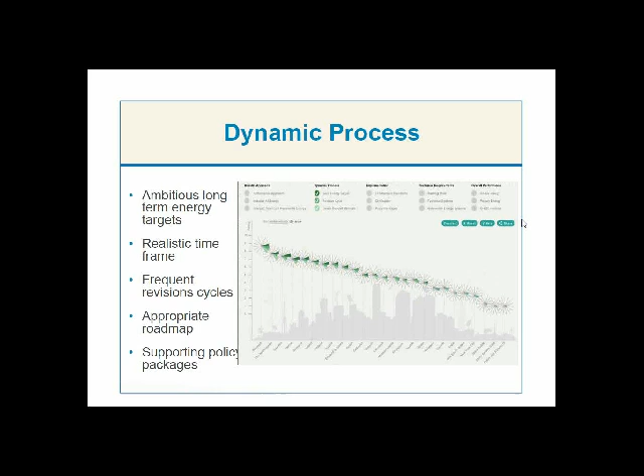You can see here a screenshot of the slide where we've just ticked all of the elements under dynamic process, and you can see how countries have rated under those themes.

As part of the dynamic process, we also considered levels beyond the minimum standards set within the code. We wanted to see if these levels have been encouraged by labeling or certification schemes, and if code developers were encouraging developers to clearly define classes and exceed the minimum standards set within the code.

To conclude, there's clearly a need for stronger energy targets supported by frequent revision cycles in a number of jurisdictions. On the other hand, we've seen a lot of positive examples out there, and we'd really like to learn from these positive and practical examples and to see how countries have been implementing these targets and revision cycles.

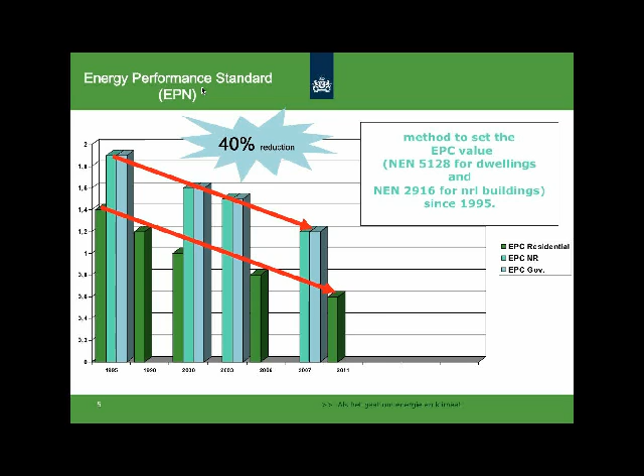If you look at the effects of this approach, since the introduction in 1995 we have had a reduction of more than 40% in energy use in the housing sector, as well as in the non-residential sector. That's quite a significant number.

If we go into the future, at the moment we are working toward what we call the road to 2020, because in 2020 we want to go to really zero energy buildings. Both the Netherlands as well as the European Union have set targets to reach this goal, and the graphic shows the way to that zero energy target over the years. So we have an EPC at the moment of 0.6, and we go in 2015 to 0.4, then 2018 to 0.2, and then finally in 2020 to 0. I will explain later what that means.

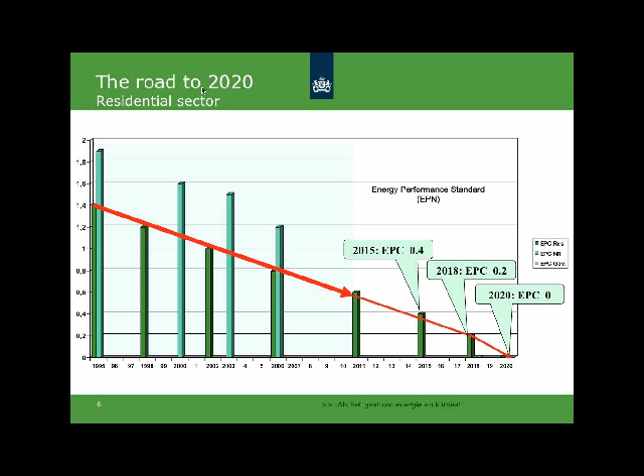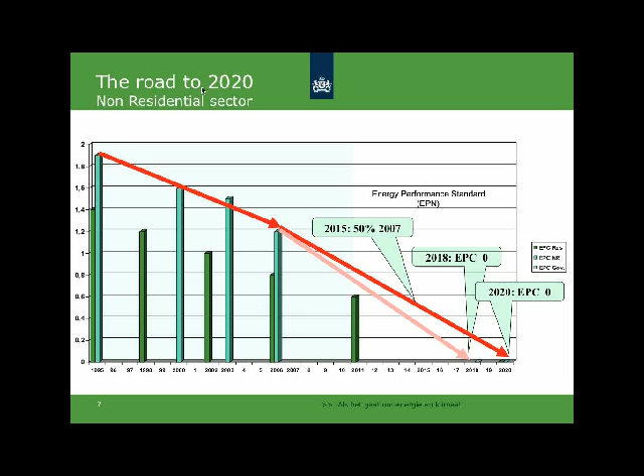For the non-residential sector, we have a more or less similar approach. What you can see here is that for new governmental buildings, we want to reach the near-zero energy building, or EPC 0 level, by 2018, to set an example for the commercial sector. These are also the targets we set European-wide. I think Kevin will show figures like this later in his presentation.

How do we do that? Because you can say, okay, we just lower the target or raise the target, just as you see it. But what's the approach behind that? How are we setting the height of the EP requirements?

Well, we started with the development of a set of reference buildings reflecting the Dutch building stock. Then we calculate the cost and savings related to the proposed energy performance level. That gives you an idea how much it costs to get higher quality in the market, and what the savings will be, not only in energy but especially in cost, related to these investments.

So that gives you really an idea whether it's cost effective or not, how much it will cost, and who should pay for this. In the more political decision-making process, we start with these feasibility studies, and in our opinion the most important part is consulting the building sector. Not only the building sector, but also consulting with representatives from the housing and social housing sector. Only once this consulting is finalized do we go to the parliament for political approval. So it's not that the government is setting the goals and saying, okay market, go on, whatever it costs, but it's really an interaction between the market and the politicians to get this done.

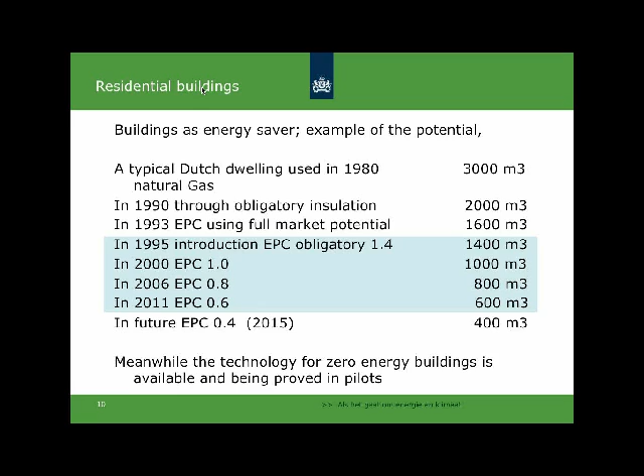So that's our reference. That's what people understand, and that's what they know they have to pay for. Now at this moment we are at the level 0.6, and the average consumption for new houses built under these codes is now around 600 cubic meters. So a huge saving has already been achieved. In this one you see the same figures but in graph form.

Can we go on like this successfully towards the EPC zero or zero energy buildings? The answer is no, as we found out in 2010. We found out that we need more detailed calculation methods, and therefore we introduced a new set of norms to get this point right. Because if you go with a very rough calculation method, it's very difficult to calculate the specific and very small

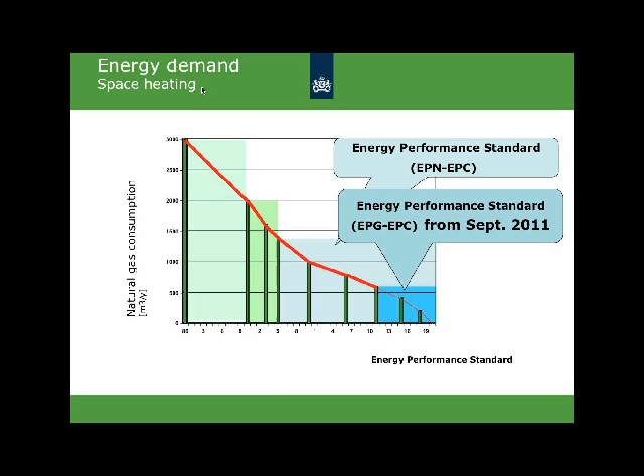savings at the end of the line going to zero energy buildings. So what we achieved was a new system with a higher degree of accuracy. New techniques were put in: biomass, micro power, solar systems and so on. Also power generation nearby houses were included. So you get a much more detailed and much more complicated methodology, but it was and is necessary to calculate near to zero energy buildings.

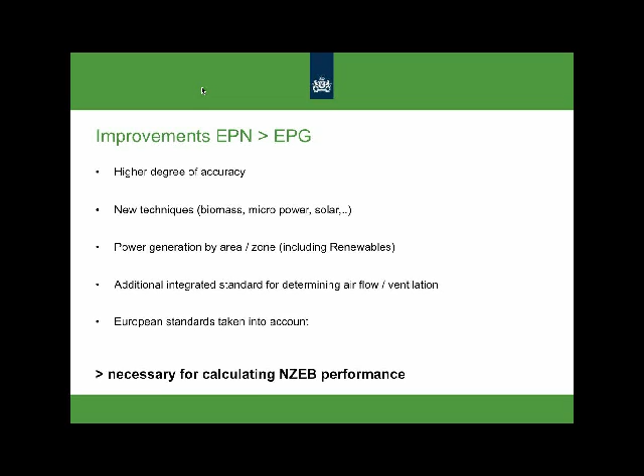The interim observations at the moment, after working with this new methodology for a few years, are that it's future proof. So this is what we will use to go to near zero energy buildings. The steps and legislations are set. The Parliament has approved the whole road to 2020 based on this methodology, and the techniques are available. We already have a lot of houses meeting the near to zero energy building level at the moment, and very importantly, the political will is there - but will the market be ready on time? Because you can build these houses on small scale, but can it be built on a bigger scale? And is it affordable?

Is it affordable? That's always a big question. I don't know, I think it's in every country, but in the Netherlands we always think about what does it cost and what will it bring to me? And until now we were able to lower the EPC value without unacceptable negative cost effects on the market. So what we found out was that due to constant product development, a growing market volume for energy saving materials, and rising energy prices, we could keep the balance between energy savings and investment costs. But what will it be in the near future?

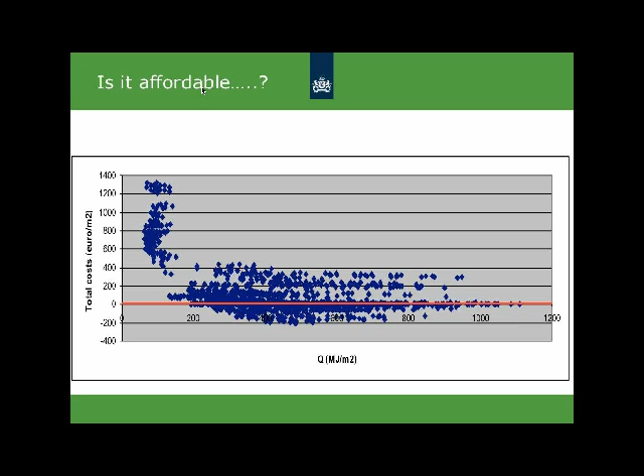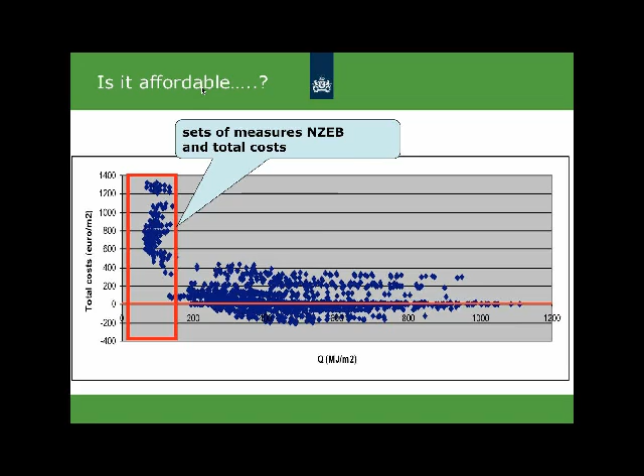I show you a graph now that explains a bit what's going on. At the horizontal line, X, you find the energy consumption per square meter. At the vertical Y, the total investment cost to get measures done to get to that lower energy consumption per square meter. And if you look at where we are standing now, the red box on the graph is the area where we are going in now. And that's the area where we need more costly measures to reach the near to zero energy goal. As we say in Holland, we are more or less climbing the mountain, and at this moment we are on the Hillary step on Mount Everest. So it's becoming more and more difficult at this moment.

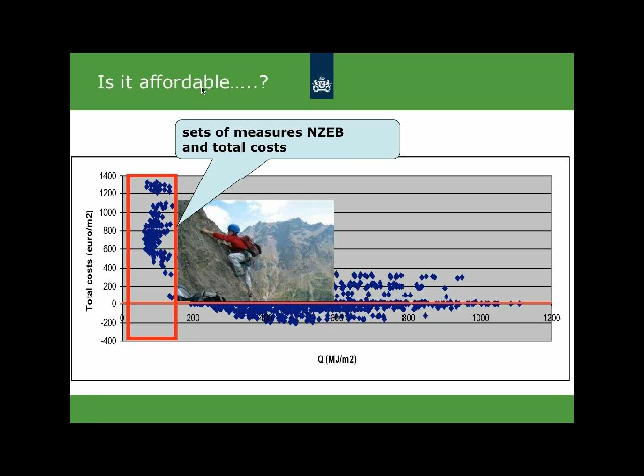But we have a methodology that gives us a good opportunity to communicate with all the involved parties and to find out what the market and the politicians are willing to pay for the energy saving and to reach the zero energy target. The big uncertainty in this whole thing is the development of energy prices, because this will dramatically influence the outcome of the future cost optimality studies. And the question is, of course, will there be real political will to go for the environmental targets if the balance between cost and benefits will not be in complete balance.

How do we get it affordable? At this moment we have a lot of subsidy schemes running - that's what I always say is an old approach, just buying the energy saving or closing the gap between savings and investment cost. But we see in the last few years good signs, and the good signs are that we see more and more green loans getting on the market, and we see all kinds of more market-driven solutions coming up.

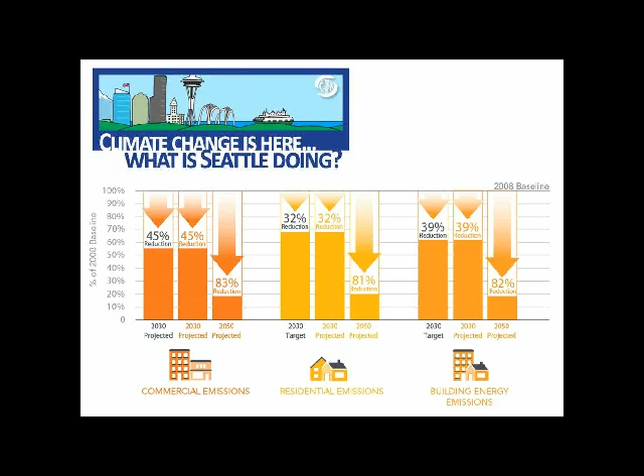We're very proud of our accomplishments here in Seattle, but if you look at them from a worldwide perspective, we're only doing well in comparison to some of the worst energy wasters in the world. So we always thank Canada and Russia, since they're the only countries with worse performing buildings than we have.

Politics and money are tightly connected. It's another good reason to make a strong business case for your code proposals. It's easy to make ambitious plans when everybody is making money, but much harder to do it when the economy is doing badly. This is a bit strange because the best thing we could do for our local economy in the long run is to send less money overseas for fuel.

The trouble is that in the short run, it costs more for businesses to change their practice than to stick with their normal practice. And climate change seems like it's a long way off in the future compared with the survival of your business this year. So to make real progress, you need to frame the arguments so that both the environmentalists and the business leaders see an advantage for themselves. This is politically tricky.

That is one of my favorite quotes from a leader here in the U.S. on energy efficiency. But ideally, we should have hundreds of buildings constructed to a higher energy standard before that becomes mandatory code. And by the way, these numbers I have on there, I hope I've got the units correct, but those include all the energy use, including plug loads and processes and everything. But just having these visible in your community certainly changes the debate dramatically.

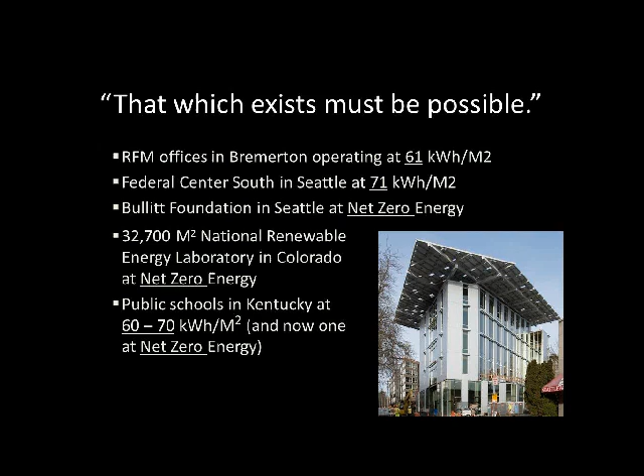Developers and builders in the U.S. usually fight against high efficiency standards. This is a bit amusing because each one of these developers and builders has an impressive sustainability page on their website showing what their great commitment is to environmental protection. But if you ask them to give up any of their standard practices, you'll hear a big explosion.

When we're asking everyone to go through a painful transition, is it better to feel a little pain over and over and over, or just to get it over more quickly, as Denmark did? My feeling is that rather than the many small steps, perhaps a few larger steps and more difficult ones might have been a smarter policy.

Well, standards for new building construction are important. Reducing energy use in our existing buildings is much more urgent because there are so many of them. One idea I have heard is that we should set a target date, perhaps 12 or 15 years from now, when all the large existing buildings will have to meet a stringent energy standard.

And then provide good loans for the work to upgrade those buildings, but let everyone know that you will lend less and less money every year. So this would give the owners an incentive to upgrade their buildings sooner rather than later, and could pay for itself since the energy savings generated would repay the loans. I haven't had the courage to try to propose that officially in Seattle, but who knows, maybe in the future.

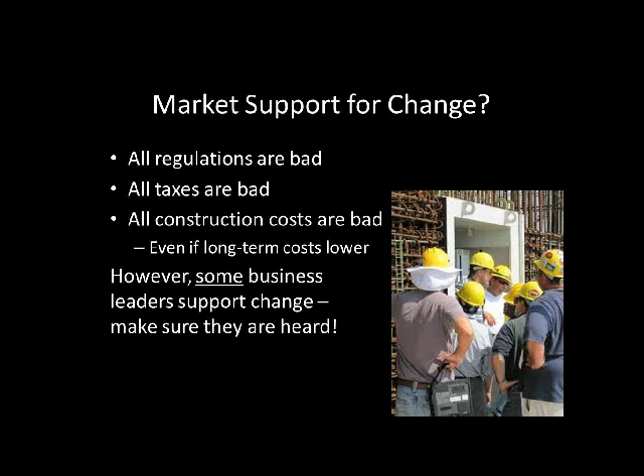However, new regulations also provide new opportunities for other parts of the construction industry. So it's good to gather support from the firms that would benefit. And also, I would say that having an energy code that's based on performance rather than like ours that are based on many specific prescriptive requirements might make it easier and be less threatening to individual industries.

Working with builders and building owners is a good thing. If we're going to develop policies that impact the construction industry, it's good discipline to prove that the energy savings will outweigh any additional construction costs. And perhaps our financiers will start valuing energy efficiency as well. And finally, if we place a label on each building showing how well it performs, like the Michelin rating for a restaurant, the public might start valuing efficiency as well.

Anything that becomes a code requirement tends to drop in cost from what it was before because it rapidly goes from being a special order to being a standard practice. Since our tax policies in the U.S. keep energy costs very low compared with most of the world, it's even more difficult for us to present a business case for efficient buildings. For those of you in countries where energy is expensive, it's much easier to convince politicians and building owners of the value of energy efficiency. So tax policy is a big deal there.

And interestingly, that last bullet point here is a well-observed phenomenon: if you do many things in a building, or all the things you know to do very well, then the costs for each of them tend to drop, and there's a great synergy.

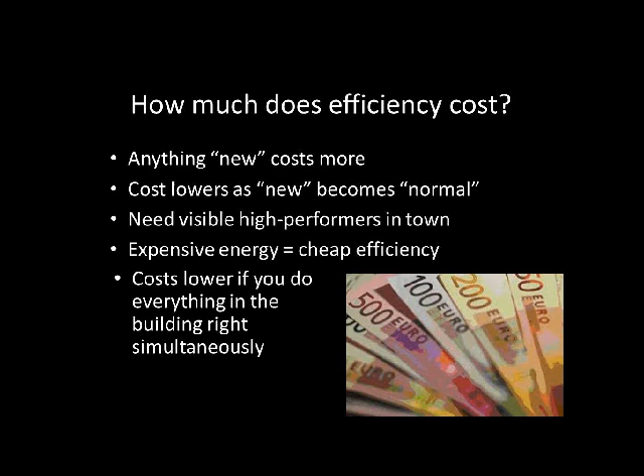Next, I want to just go through a few of the new code requirements that we enacted in Seattle this year. This first one, our target performance path, is a simplified energy code, actually very much inspired by Denmark, that simply sets an energy use target for each building type and then leaves it up to the design team to find a way to hit that target any way they like. The team will submit an energy model to get their building permit, and then after construction we'll track their building's energy use until they operate for a full year within their energy frame.

Here, like I mentioned before, here in the U.S. we have to do this second part because our energy is so cheap that there's not otherwise much motivation to pay attention to our gas and electric bills. I just looked it up, and I believe electricity in Denmark is 6 times the cost that it is here in Seattle. So it's much easier to get people in expensive electricity areas to pay attention to that than it is here, where we have electricity pretty much coming off of our mountains all the time.

Commissioning is our word for an independently verified study of a new building showing that all of the energy systems work as they were intended. The problems that commissioning agents discover are sometimes quite shocking. This process extends well past the construction phase and into the building occupancy phase. So Seattle now is requiring a separate permit to ensure that all the systems are tested and working properly together, even well after the tenants move into the building.

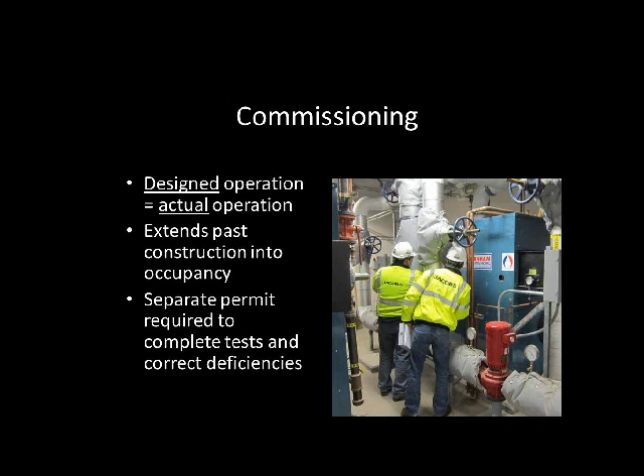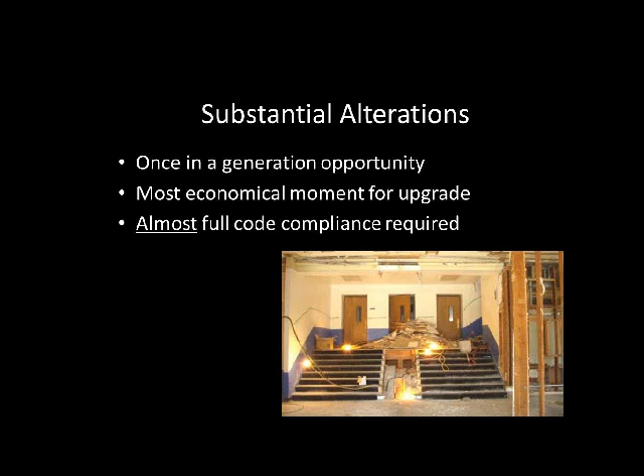When a building undergoes an extensive renovation, something that really extends the life of the building, we now require that its energy performance reach nearly the standards for new buildings. There will never be a more economical moment to improve the building's performance. And if such a huge change to a building only happens once every 40 years or so, we can't wait another 40 years to get to that point. And these projects might actually also be able to use that target performance path that I mentioned earlier.

But they only have to install a very small system right now. Then they'll be able to put a large system in 5 or 10 years from now without the expense of moving vent pipes and fans and other gear out of the way on the roof. Solar PV is one of the only things in the entire building construction industry that's getting cheaper as we go forward. So saving that money for a few years down the road might be a smart investment, and put money now into just making the building envelope function well.

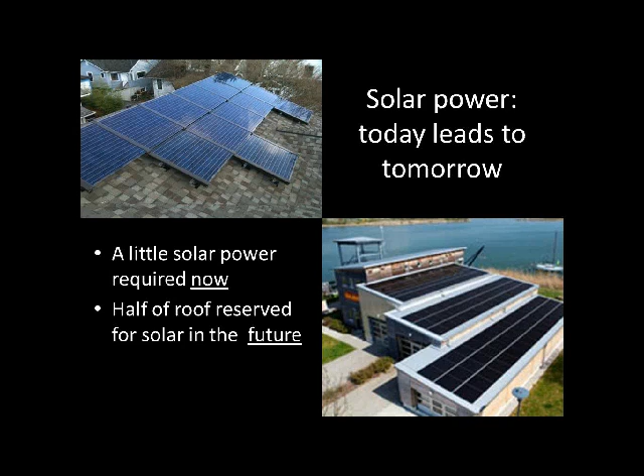Seattle already requires an advanced metering system in each building so that the building managers can track their energy use in real time. This new rule requires tenant spaces that fill at least a full floor of a building to provide a separate dashboard for the tenant itself to be able to monitor their own energy use. The idea is that the building management doesn't have much control over what is going on within the tenant space, but a tenant who can see on an hourly basis how their energy use is going now compared to how it was this week last year has a much better chance of being able to study that.

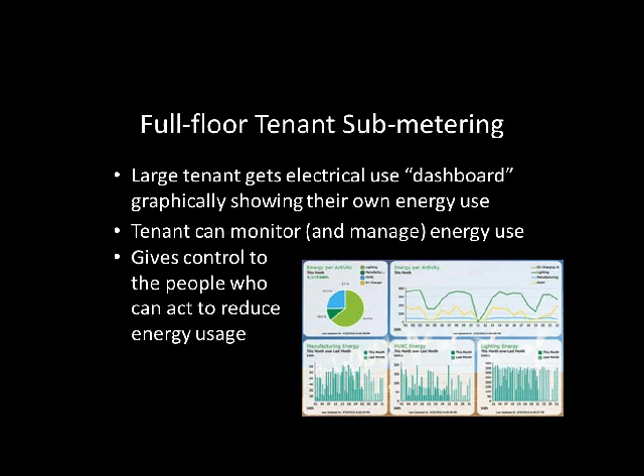The plug load rule requires offices and classrooms to have half of their electric outlets controlled with occupancy sensors or automatic time clocks, just as we do for lighting systems now. This way, there will be one controlled outlet next to each standard outlet. Electrical loads that are plugged into the controlled outlets will turn completely off when no one's using them.

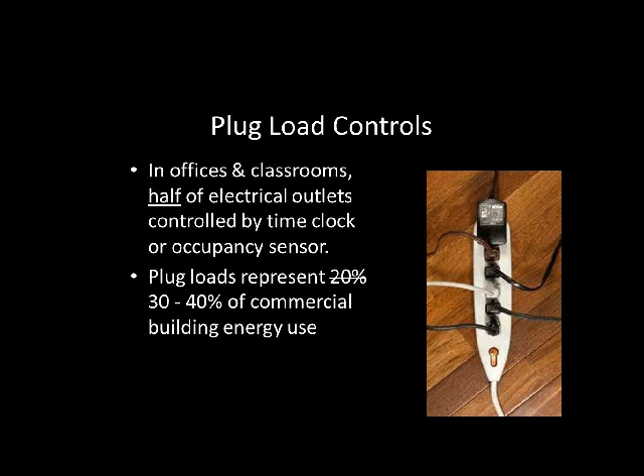And now that we've seen that in newer buildings which are getting more efficient as far as their other systems, the plug loads represent more than a third of the total energy use in a commercial building. So anything that could reduce that energy significantly is going to be a very significant reduction for the overall building energy use.

For focusing on results, my strong belief is that the U.S. needs to transition away from our prescriptive energy codes and towards performance-based and verified building energy standards. We need hundreds of buildings that use very little energy and are economical to build, but that also provide great beauty and comfort. You can't have your high-efficiency buildings be ugly or uncomfortable. And this will change what everyone thinks of as normal and make it easier to bring the minimum code standard up to a higher level in the next cycle.

And finally, we can speed up our progress tremendously if we engage those groups that oppose such regulations and listen to them and learn from them. When our arguments become strong enough and convincing enough that our adversaries adopt them as well, then we'll know we're doing it right.

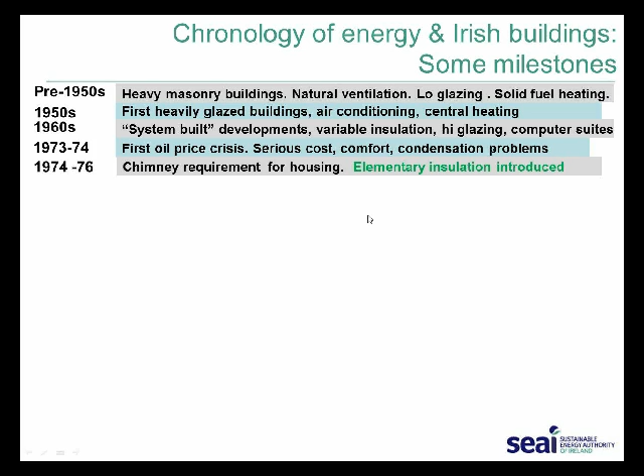There's a long chronology attaching to this whole story, and you know, we started from a very low base, I'd have to say, in the late 70s in Ireland, when elementary insulation first got introduced, and that was purely at elemental level. I think attic insulation or roof insulation was the first. That got a little bit strengthened in the early 80s, but once the crisis receded, we ended up with, you know, something of a business as usual, a gradualist approach to improvement.

And we in fact had about 78%, I think, at one point, of Irish homes in the late 80s reliant on solid fuel heating systems, predominantly open appliances with efficiencies of less than 50%, for their main source of heating. So we were starting, just 25 years ago, from a relatively poor base.

1991 was actually the first introduction of formal building regulations, which strengthened the elemental U values somewhat further. And those got strengthened further in 1997 with the introduction for the first time of an overall energy in buildings calculation method, a performance approach, if you like. But the real progress has been made quite strongly over the last 15 years. We got a further strengthening in 2002, but we've had a significant change in impetus since the middle of the last decade.

I won't go through this in detail, because I will be touching on some of this later on. But we've had the introduction of building energy rating, we've introduced incentive schemes, strengthening of energy standards 5 times in the past 15 years overall, the introduction of a renewable energy obligation, and energy efficiency retrofit or renovation programs introduced for housing and other sectors in the past 5 years also.

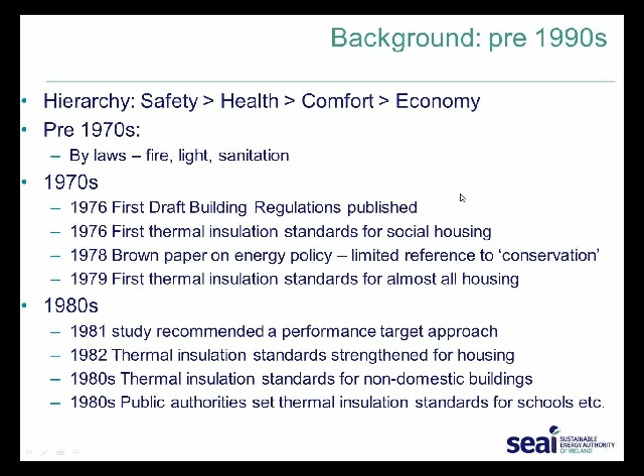But as I said, the important point as far as targets are concerned is that targets first found their way into formal policy in 1997, even though I was part of a study group that recommended it back in 1981. So that tells how much inertia there was in the system back at that time. But in the 90s, we got the National Climate Change Strategy and a Green Paper on sustainable energy. SEAI's precursor was established in the mid-1990s, and fuel poverty began to be addressed. We saw a greater groundswell of public consensus and industry receptiveness to more progressive energy standards.

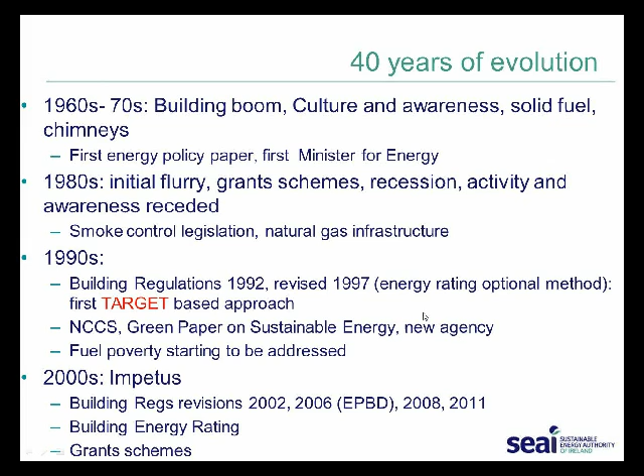The most recent variations of the building regulations for housing introduced energy and carbon performance targets from 2006 onwards. The 2 steps, 2008 and 2011, reduced energy consumption and CO2 emissions by 60% relative to the mid-2000s. We've introduced a mandatory renewable energy contribution per square meter of 10 kilowatt hours thermal or 4 kilowatt hours electrical, introduction of thermal bridging and air permeability criteria, particular limits on efficiencies of heating systems, and particular measures on space and hot water. And another element is that lighting is very much part of the methodology.

So the actual computation procedure is primary energy per square meter for space heating, water heating, associated electrical mechanical power for pumps and fans, and lighting. And it's primary energy, where the typical primary energy factor for electricity is 2.5.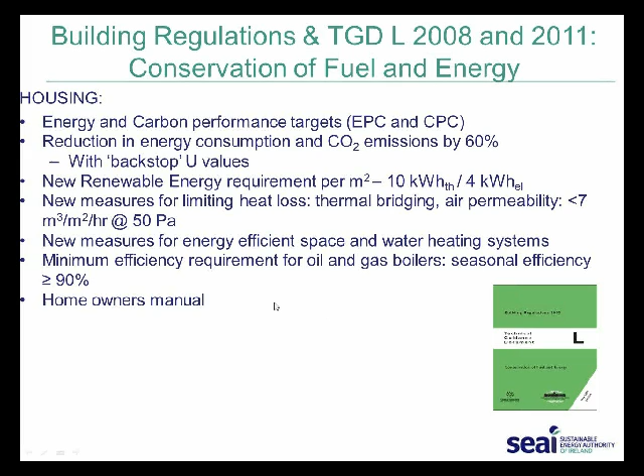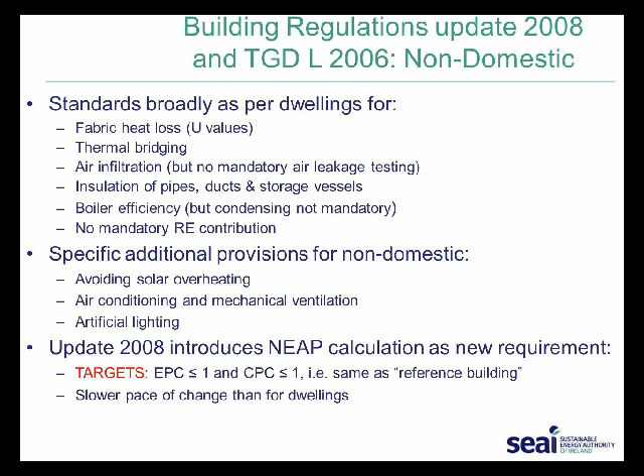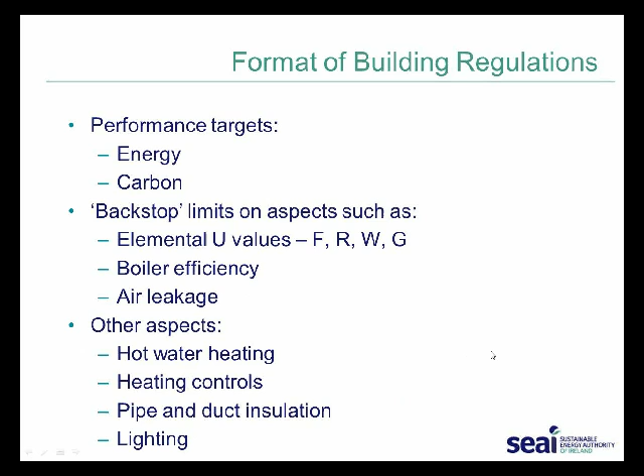A broadly similar approach has been taken in non-domestic buildings, but there hasn't been the same aggression in the strengthening of the standards. But there has been a codification and systematization of the requirements in the right direction. And currently there is a review initiated by the Ministry for the Environment of the standards for non-domestic. Apart from the performance targets in energy and carbon, there are backstop limits on aspects such as elemental U values, boiler efficiency and air leakage. And we've had hot water heating controls, pipe and duct insulation and lighting covered as well. The building energy rating got introduced on foot of the Energy Performance of Buildings Directive in 2006.

It was late 2006. It was formally legislated for, but it effectively began to get traction seriously at the end of 2008, and the same common methodology is used for this as for the building energy performance figures. I think this is all pretty familiar to anybody in Europe, and for those of you outside Europe, I think this is again rather familiar.

What's significant here is that we've had over 350,000 building energy, home energy ratings in the period since, in less than 5 years, which represents a fifth of our housing stock - quite a considerable pace of building energy ratings. I think it has had a very strong empowering impact in the market, and studies have shown that it has impacted on prices. One of the things building energy rating tends to favor is it gives something of a market edge to new dwellings over existing ones in terms of the energy dimension of their performance.

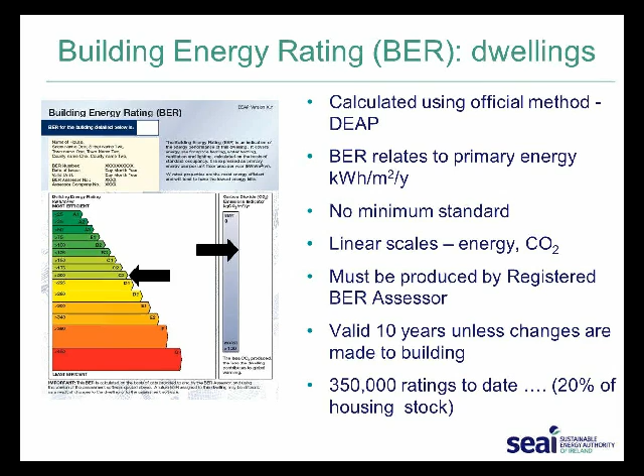This is the outcome of the progression in standards. On the right-hand side I'm showing the relative building energy ratings from A to F, A being best, and you're seeing that we've migrated from a level in the mid part of the last decade of about 156 kilowatt hours per square meter primary energy, down to 63 kilowatt hours per square meter primary energy today in the standards. Near-zero cost optimal studies are indicating a figure of the order of 40 kilowatt hours per square meter constitutes a near-zero energy building as far as the EPBD recast is concerned, but I'm sure that's very much open for debate at the moment.

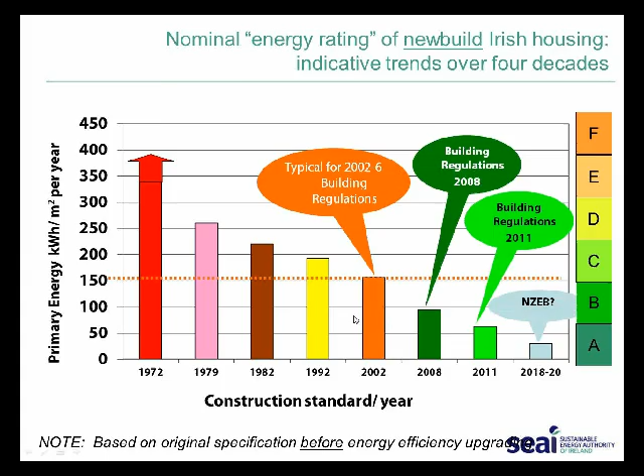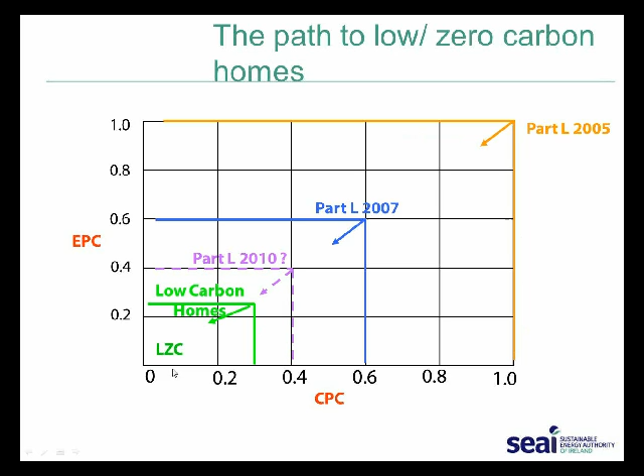So we've had this progression through these steps, and we're now heading for near zero. Another way of representing this is just looking at the energy and carbon indices - we've been moving down all the time from a ratio of 1. We set the benchmark or datum level in 2005, and are moving down towards low zero carbon, or energy positive buildings, hopefully within this decade.

There were 4 questions I was asked to address. Number one, what were the market conditions at the time the targets were set and introduced? I suppose they were very buoyant in Ireland in the mid-90s. Ireland went through an unhealthy construction boom from the mid to late 90s right through to about 2006, 2007. So we had a lot of industry innovation and confidence in that market.

We had a lot of competition on energy standards between the masonry and timber frame sectors. It was becoming very visible. And Ireland is a very open economy - there's a lot of exposure of the construction industry players to having worked abroad. There was a lot of internationalist influence and technology change, less fear than there might have been in the past of innovation in the construction sector. That would have been derivative too from other sectors of the economy in which we had extremely rapid change. We have a very strong ICT sector in Ireland.

Was it a struggle to get support from the market, and if so, how did we manage to get it? Much less struggle, much less inertia than in earlier decades. There was a general greening of societal attitudes, I would suggest, in that period. Again, we're a very open economy, very much open to the world. We're a small country which hears a lot of the global debates.

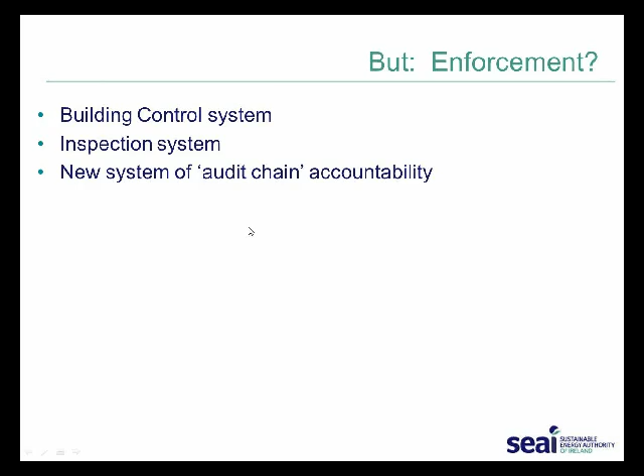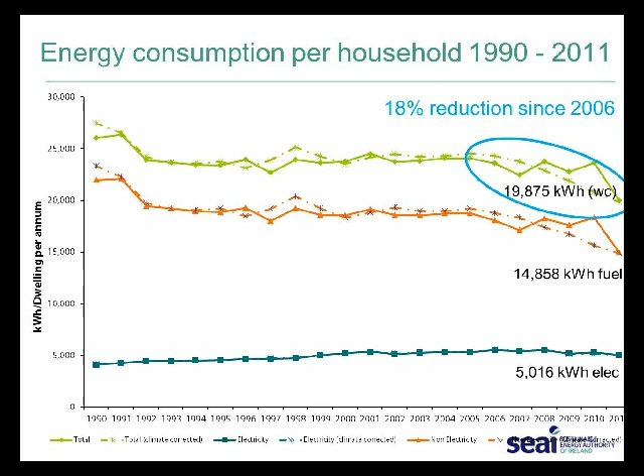What impact? What has been the outcome of all of this? Roughly speaking, we've had an 18% reduction in energy use per dwelling. Now, this isn't all attributable to building regulations, as I'll point out in a minute, but there's been quite a dramatic change in the period 2006-2011, in a study we published just two months ago. This shows average dwelling energy consumption has fallen by that much, not just in fuel, not mainly in fuel, but also in electricity.

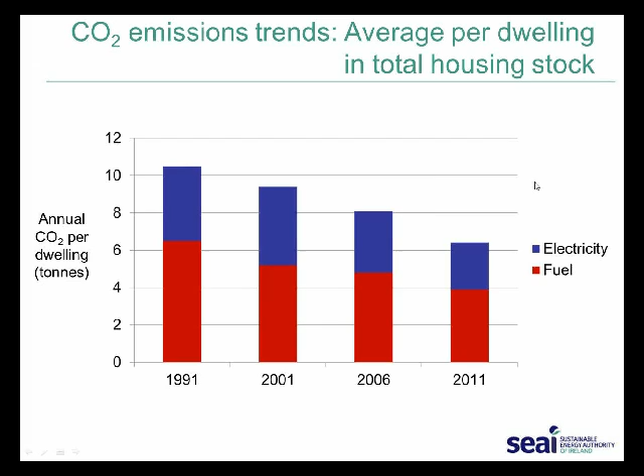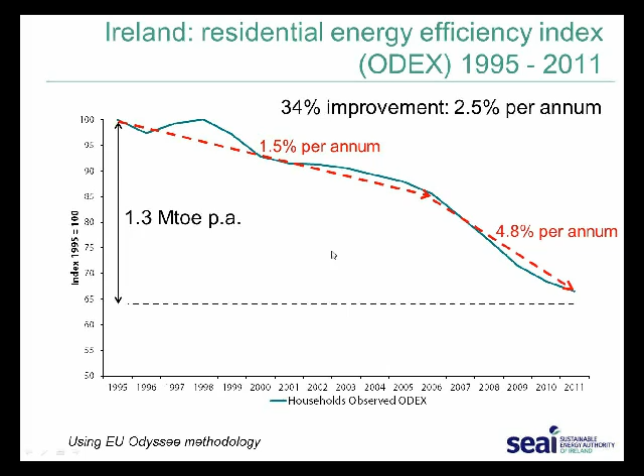The decarbonisation of electricity has certainly helped in that component, but we see the thermal component has equally fallen significantly across the whole building stock. Overall, across the stock, using the EU Odyssee methodology, the pace of improvement in the energy efficiency index of the dwelling stock has more than trebled in the period since 2006 relative to the previous 11 years.

When we analyze this, there are three major contributory factors: new build, let's call it asset quality through the building codes; retrofit upgrading, which has been very aggressive—we've had 250,000 of our homes retrofitted in the past 4 years; and behavior change, which would include responses to both economic downturn and energy prices, but also many other DIY type actions taken by people.

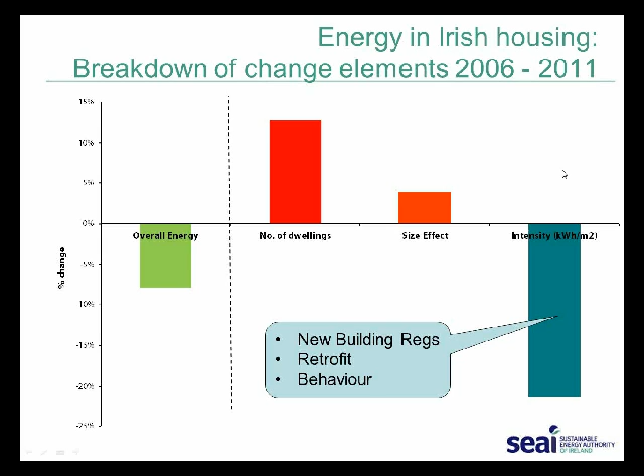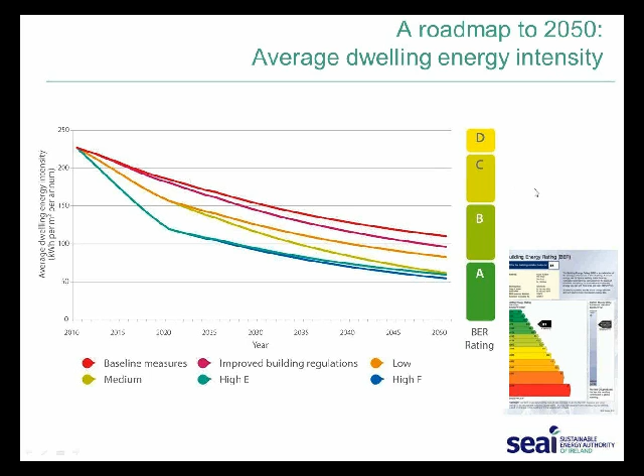The roadmap to looking at the next steps, roadmap to 2050. This is a document that we published, I think, nearly 3 years ago, as a kind of envisioning of the future pathways towards both new build standards, obviously going to near zero and below, and upgrading of the existing stock.

Live challenges: that major emphasis on retrofit renovation, the enforcement regime, the whole question of the cost dimension to cost optimal methodology, which I think Hans has particularly referred to in his closing remarks. And I think when it comes to that methodology, we do have a challenge in relation to setting of new codes as to whether we do them on the basis, for example, of energy prices or carbon prices—snapshots of what they currently are—and assessing cost effectiveness on that basis, or on the basis of projected energy or carbon prices, or indeed renewable energy components in the electricity mix over the lifetime of the building.

Do you look to a 30-year time horizon, and do you accept these types of trajectories that are being proposed, say, in smart grid or renewable integration expectations? So that's a huge challenge, I think, not particular to Ireland, but I think it's for most countries.

So approaches to renewable energy integration: what are the best approaches? What flexibility, on-site, off-site? As I said, smart grid and smart cities, and the treatment of electricity and the primary energy ingredient. The need for more attention to non-domestic buildings, and of course, as I said, the skills challenge.

I suppose in all of this, regulation does drive innovation. I think this remark was made earlier. We see the example in window standards—it's now cheaper to get a double-glazed window, or not yet a triple-glazed window, but a double-glazed window rather than a single-glazed. And hopefully the day will come when triple-glazed windows to passive house type standards will be as cheap or nearly as cheap as double-glazed windows.

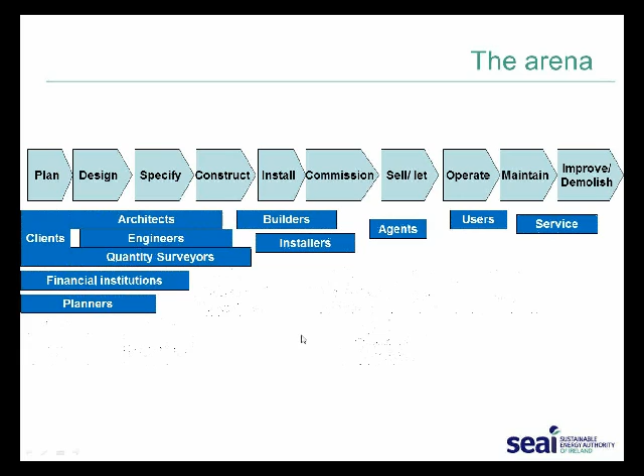So we're dealing with an arena in which we have all of these steps in the process between the dreaming of a building and delivering a building. We have all of these players who are playing on the stage or in the orchestra. We have all of these other now specialist service providers coming in and tools to try and support them. And then we have the oversight and infrastructure, if you like, through registration and regulation trainings.

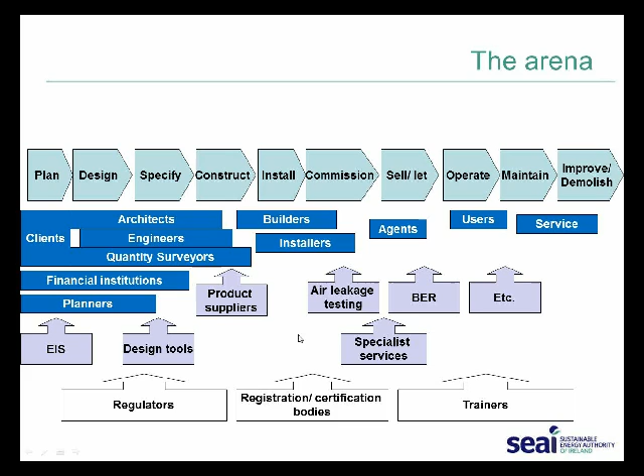Very, very complex arena, a huge challenge. It's not just the skills of those on site, it's the skills of all of these other players as well, and of course the infiltration of these skills consistently across the industry and the behavior of the industry. So it's a supply chain, skills chain, quality chain issue.

So if I was to summarize in terms of what have been the success factors, or what that led to—that I suppose would have characterized this making sense of the past, as I would call it—there have been the ingredients of leadership, political consensus, a target-setting approach, informed by evidence, and in an environment, I think, of confidence. Confidence not just in the business case, but confidence in, I suppose, just the wisdom of the whole thing. Capacity to adapt and innovate, skills and enforcement are more challenging, and I suppose the core of it is approaches of partnership among stakeholders, policy support, and evidence.

So I think that concludes my presentation. Thank you very much.